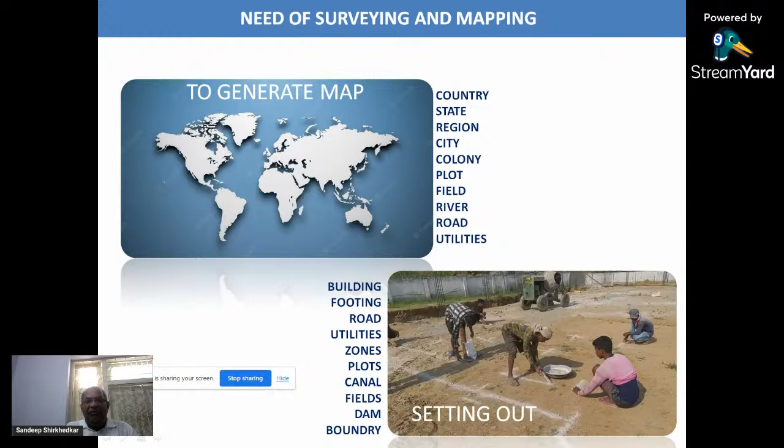As shown in this figure, setting out of the column positioning is being marked by using the survey techniques. Very simple technique is used here, only chain or tape is being used to map this.

So these are the few traditional techniques which we are aware of: dumpy level, automatic level, prismatic compass, plane table, vernier theodolite. We have ourselves conducted various assignments and practicals during our curriculum, and we are very much used to these techniques. This is what I presume, and this is what I understand.

But these techniques have got certain limitations as compared to today's advanced technologies. The time required for preparing a map is much more in these technologies than what we consume today. Then accuracy is another thing on which these recent technologies have worked very hard and came up with very accurate solutions for us.

Like in a prismatic compass, we have accuracy of half a degree, that is 30 minutes. Like in theodolite, 20 seconds.

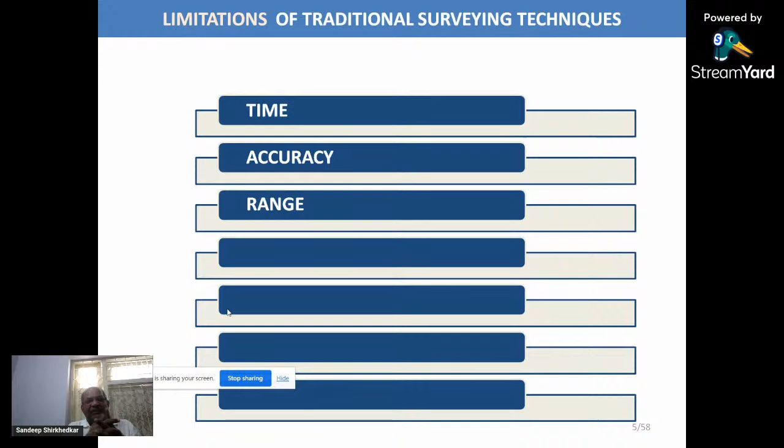While measuring at elevation, this leveling staff has got a least count of 5 millimeters. But these days, very super accurate instruments are available. You can even map a fraction of millimeters by using advanced technologies.

Another limitation of traditional technology is you don't know exactly where on the surface of the earth the object is. Now with new technologies, by taking help of GPS, that is global positioning system, we can identify our position on the surface of the earth, and it becomes very easy to connect various databases. For example, if somebody asks me to conduct a survey for Anjuman complex and someone else is doing it for the VNIT premises, and if I need to combine these two surveys, then we need to know the global positioning of the objects present at both locations. With traditional techniques, this may not be possible.

Human resources: in traditional surveying techniques, we need a lot of resources to conduct the survey, whereas the requirement of resources is very limited when we use these advanced technologies.

Then comes weather. You can work in all weather conditions. Like plane table surveying, you may be knowing that under moist conditions it's not possible to work, but with the new technologies, we can very much conduct mapping operations even during a rainy season or monsoon.

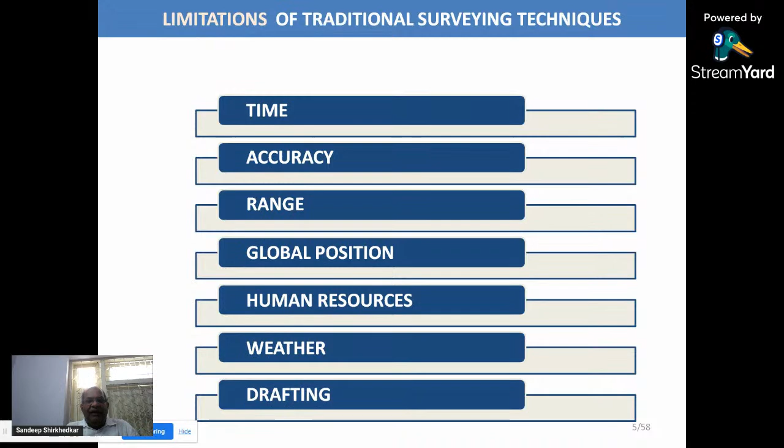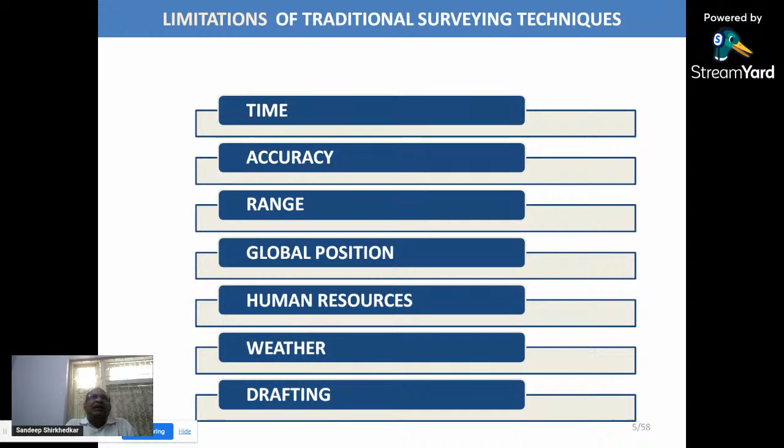Next is drafting. You have to collect data sets and then go to the office, and then on a drawing sheet or a graph sheet, or maybe on AutoCAD, you have to draft those things. This data is collected using traditional techniques, and the drafting is also a challenge. But nowadays, most of the data is collected in a digital format, and it is very easy to prepare a drawing, with most of the drawing work being done by the software itself.

So before moving to the technologies, we need to have our concepts clear about coordinate geometry. Coordinate geometry we have been learning since ages, since 6th, 7th standard. We are taking help of coordinate geometry for preparing maps or graphs.

So like a graph sheet, this Earth is also like a graph paper. It has got x and y coordinates. As you may be knowing, latitude and longitude - the horizontal line we call latitude, whereas the vertical line we call longitude. So every point on the surface of the Earth has got a unique latitude and longitude.

You must be agreeing with me - every point on the surface of the earth has got a unique latitude and longitude. And it makes my work very, very easy and simple, because every point, maybe in India, maybe in Africa, maybe in America, has got a unique latitude and longitude.

And the elevation, generally we refer it to the mean sea level. As you may know, for India, we observe elevation with respect to mean sea level at Karachi. So X, Y, and Z coordinates denote easting, northing and elevation in the language of survey - X direction is easting, Y direction is northing, and Z direction is elevation.

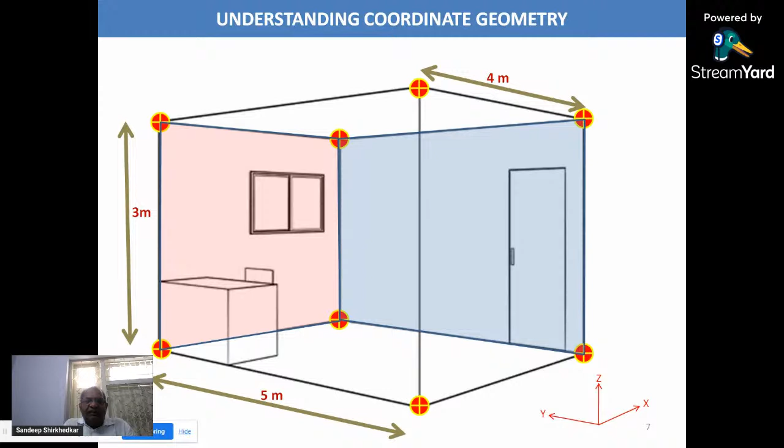Now if somebody asks me to generate a map of this room - 3D map here I'm talking about - I need the coordinates of only 8 points. If I opt to get the coordinates of these 8 points, it is very easy for me not only to generate a map or a plan, but I can also generate the elevation and the 3D view. These 8 points represent the entire room.

And if we discuss the coordinate system, for different points, if we assign the coordinate as 0, 0, 0 for x, y, and z coordinates, then the coordinates of all these 8 points are mentioned accordingly. So with reference to one point, considered as a reference point, we could identify the coordinates of this point. Imagine, by virtue of some technology, if we get the coordinates of these 8 points, my survey becomes very easy.

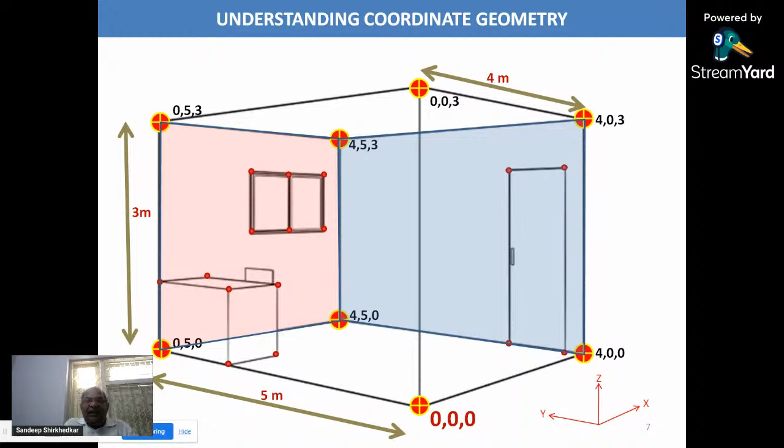I have also added more points in this figure which represent my window, door, and table. So this is a set of points for which I need information - I need x, y, z coordinates.

If we observe all these points together, I'm looking at all these points, see this - you will find n number of points over there. And this point we call a point cloud. All these points we call point cloud because these points have x, y, z coordinates. So this is a point cloud.

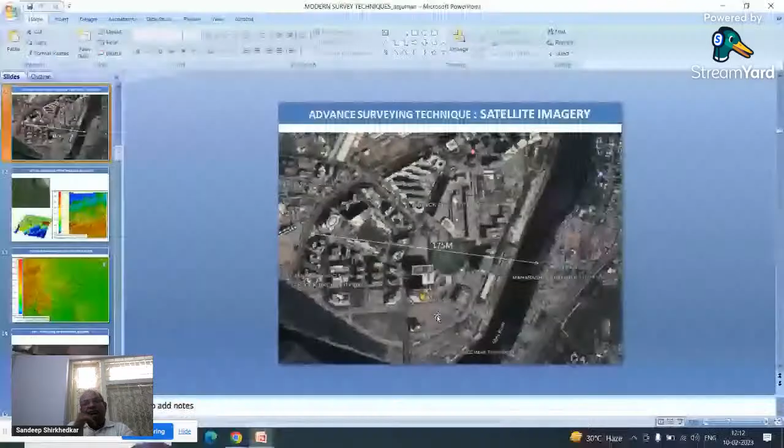Hello. Yes. Azad sir. Hello, Azad sir. Ashwini madam. Hello. Hello. Azad sir. Yes, sir.

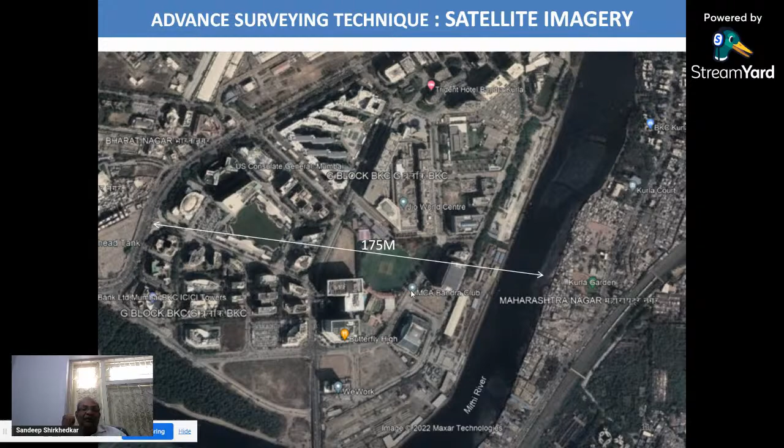Small objects, even 0.3 meter objects, nowadays we can identify through satellite images. Satellite images also help us know the elevation. But till now, the technology is not accurate enough to identify very precise elevation, though in general we can know what is the slope of the area.

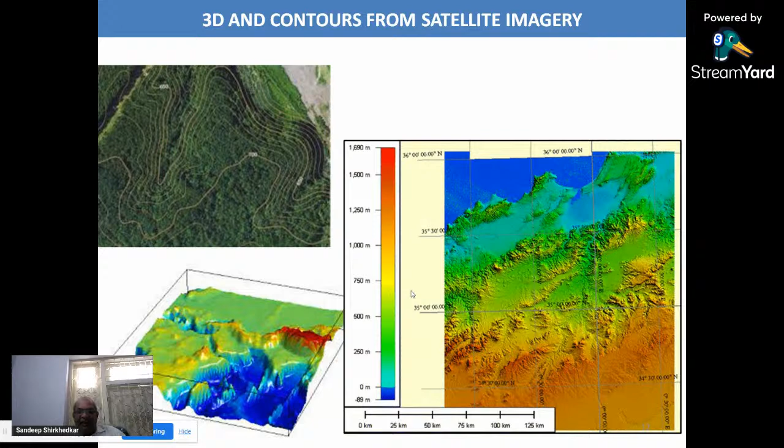Google Earth is an open source application. You can download it and start using it. You can also measure distances using it.

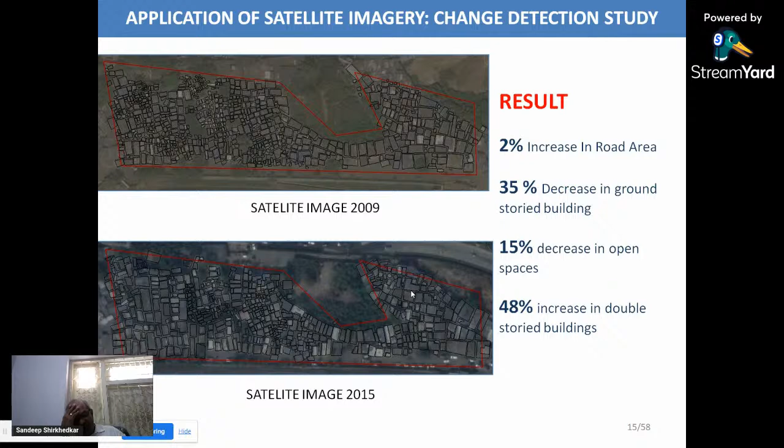One study we conducted using satellite imagery is a change detection study. I was required to identify what changed from 2009 to 2015 in a slum area adjacent to Bombay Airport, Mumbai. I found a 2% increase in road area, 35% decrease in ground storied buildings, many of which were converted to G plus one structures, a 48% increase in double storied buildings, and some open spaces decreased. This information is easy to get because historical satellite images of any area are available, allowing comparison of pre and post data.

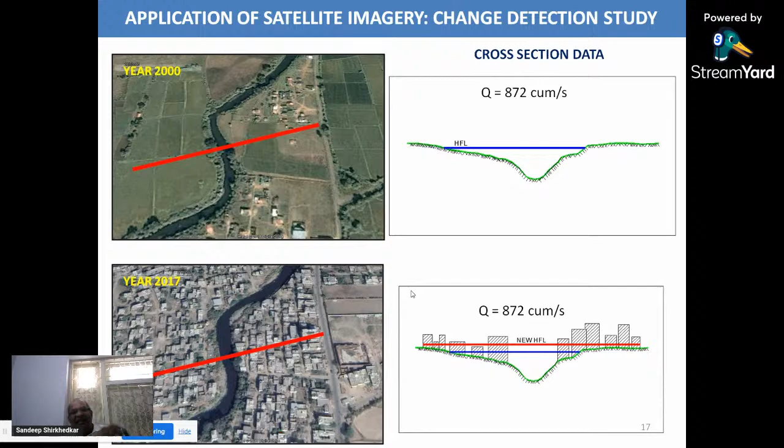So yes, this sort of study is possible by using satellite imagery.

I'm sharing all these things because it will not only give you insights about what is happening, but also insights about how you should proceed further for whatever research or project you are into. This may also give you ideas about your probable project assignments or career goals. I'm sure this information will help you a long way.

Another instrument we use extensively is GPS, Global Positioning System. It is a satellite-based system with satellites available round the clock, allowing us to find the XYZ coordinates we normally use.

We use this GPS generally for navigation purposes, for getting directions or reaching some location. For example, if I am right now on Wardha road and required to come to Anjuman College, I'll put the destination as Anjuman College, and this Google Map, mobile map or GPS map will guide me to your place. This is how we use GPS.

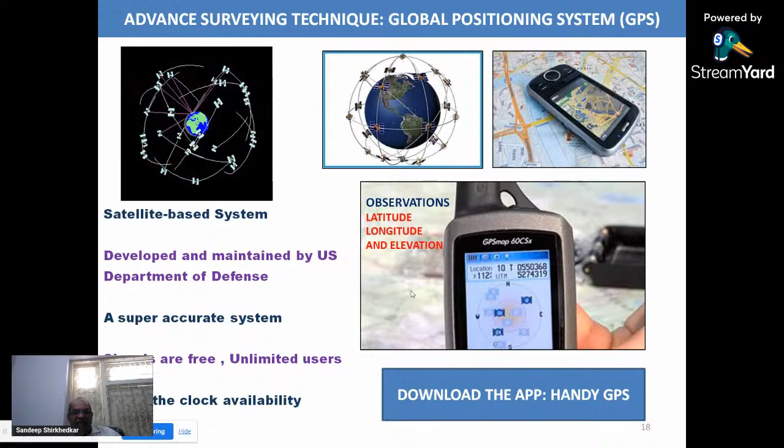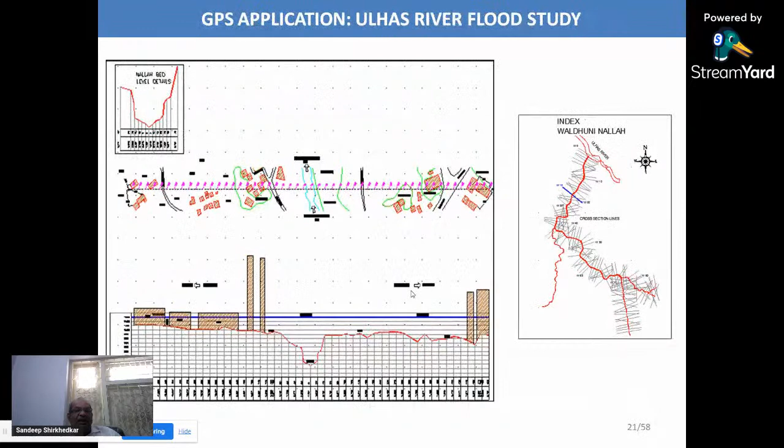GPS in differential mode is generally used for precise survey, wherein two points are observed simultaneously - one known point and another unknown point. On the known point, we fix a tripod and one base.

Observing the data, based on the rover combination we use, accuracy can even be up to 5 millimeters. In my opinion, it is a super accurate system.

Even in a total station, if you need to observe - imagine one point is on one side of my building, another is on another side of the building. For total station, I had to observe one point, move around, take the total station through a way to reach the rear side and then reach the point and observe the reading. But with this GPS being connected with the satellite, I'll go and observe a reading on the front side, go to the rear side and observe a reading, and that's all - I get the coordinates of the point under consideration.

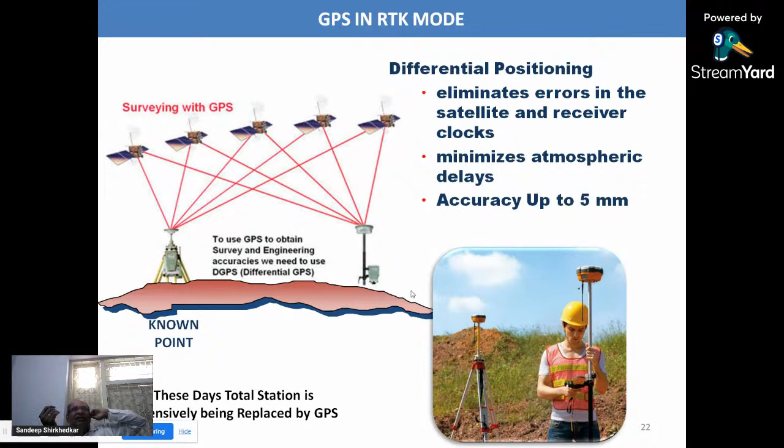So this is a very fast method. Round the clock satellites are available, even during rains you can conduct your surveying activity. So it's very extensively used, and nowadays at most projects it's a very good replacement for the total station because the work speed has increased with the invention of GPS in real-time kinematic mode, RTK mode as we call it.

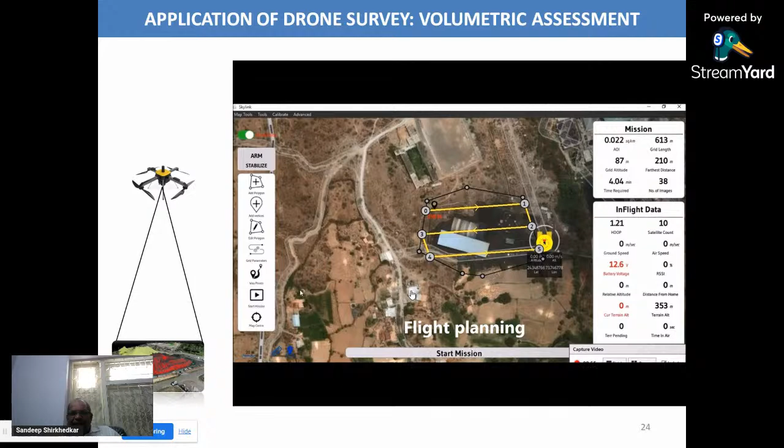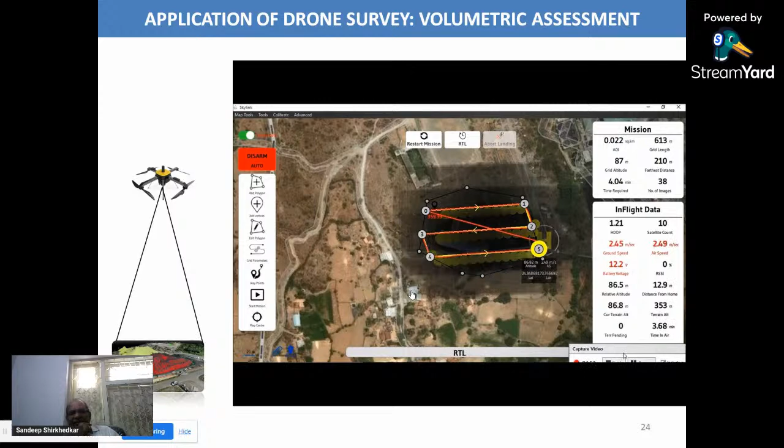My drone will move exactly along the programmed path, and now it will reach there. It's going, my drone is reaching the starting point. Yes, it has reached and now started collecting the data by moving along the specified path. So now data is collected and my drone will fly back. In a few minutes, a very big data set is collected.

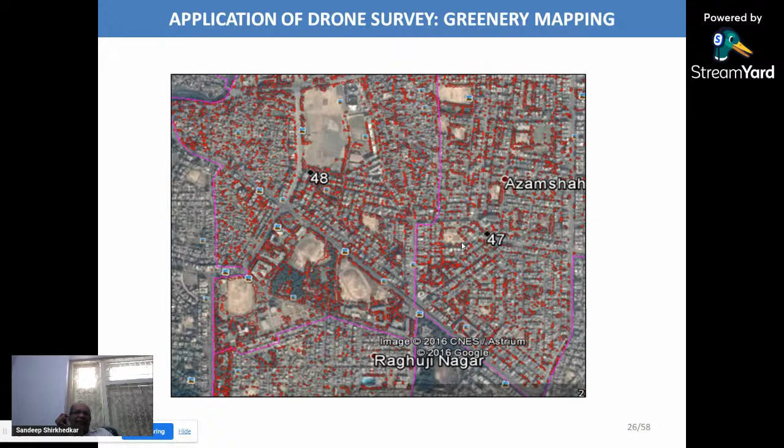So by using satellite imagery ये trees की canopies identify किया। और कुछ critical areas में we have used drone, like यहाँ दिख रहा है जैसा अजनी का area था हमारा, बहुत सारे पेड़ हैं वहाँ पे। इसलिए उस area को we have captured by using drone। ये हमारा अजनी का area जिसपे drone से data capture किया जा रहा है।

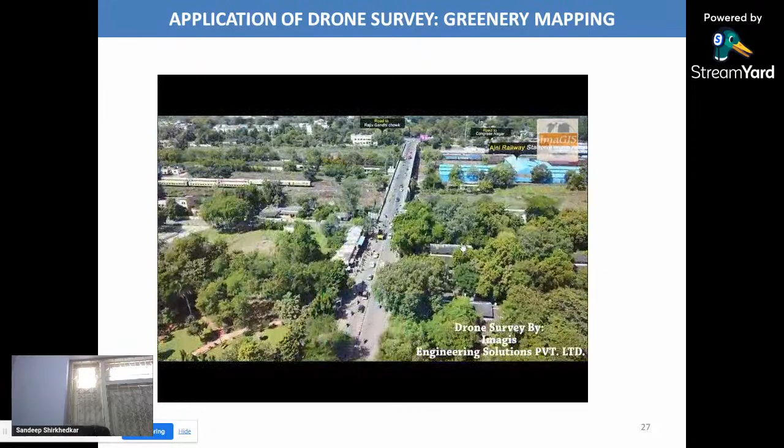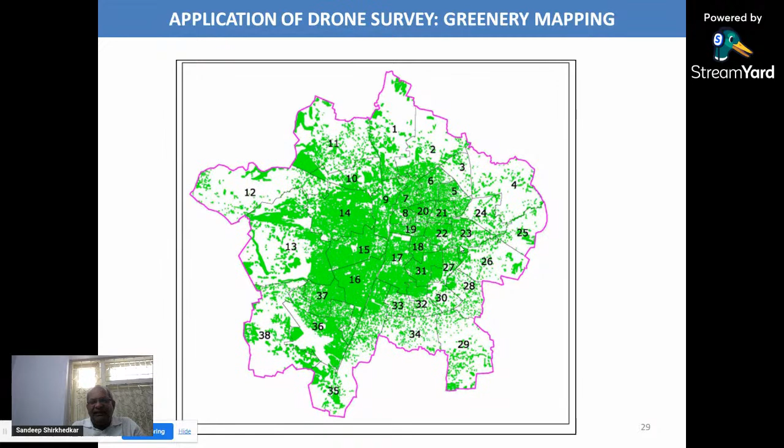Yes, यह दिस इज our अजनी ब्रिज, जो traffic जा रहा है, और railway के rakes भी हमें दिख रहे हैं, और ये यहाँ greenery है। तो सारा data compile करके, tracing करके, canopy जो है उसके identify करके, at the end of the day इस प्रकार का map हमें नागपुर का generate करने मिला। There are few प्रभाग जहाँ बहुत greenery है, और at the same time few प्रभाग जहाँ पूरा dryness है। So at the end of the exercise, this was the outcome।

There are certain प्रभाग like number 14 जहाँ 40% की greenery है, और certain प्रभाग like number 4 जहाँ सिर्फ 2% की greenery है। 40 कहाँ और 2 कहाँ, इतनी disparity हमारे इस नागपुर शहर में है। And for that matter, most of the cities reflect the same signature।

Mysore being a greenest city of this country, I tried to analyze even the Mysore area. I could get the similar results. So yes, for the equity development, this is not at all acceptable. So we need to plant more trees in the red zone areas than the green zone, because green zone is already all covered.

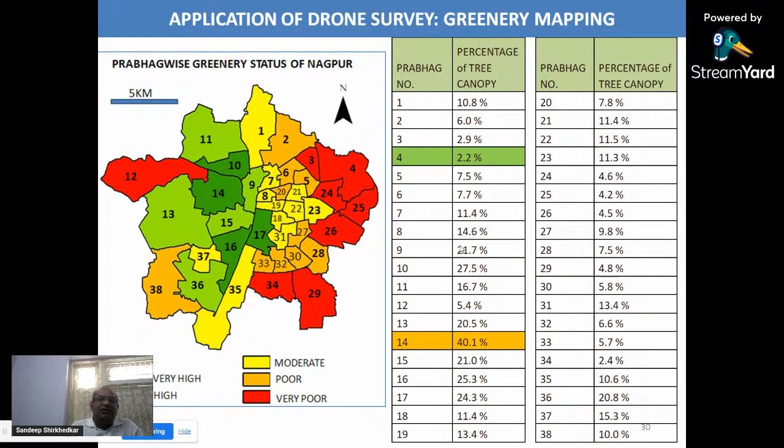Let us talk about echo sounder underwater survey. A very simple instrument is being used. This study is for sedimentation analysis for one of the reservoirs in Andhra Pradesh. My job is to find the quantum of sediment

accumulated. आप जानते हैं पानी के साथ साथ जो है sediment भी वही कराता है और quantifying sediment generally decide the remaining life of a dam। So ये echo sounder है।

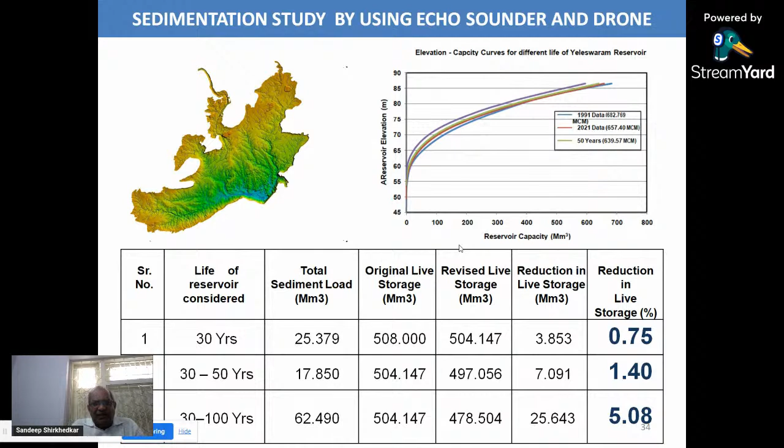ये है हमारा echo sounder जो कि हमें river bed की information देता है। Bathymetric survey आपने सुना होगा ना, ये bathymetric survey है पानी के नीचे का। फिर nowadays drone और echo sounder ये भी एक साथ use होते हैं। हमने ये अभी तक use नहीं किया है लेकिन it can be used।

Yes, and this is what we get at the end of the day. ये हमारा reservoir base के profile and we can compare it with the earlier data sets to get the sedimentation। You can find out big fish. You can study the aquatic life or whatever scenario is there, pollution below water, that thing can be analyzed।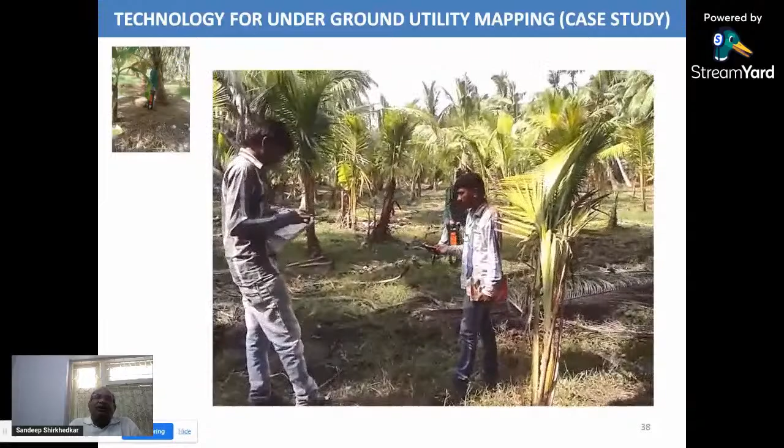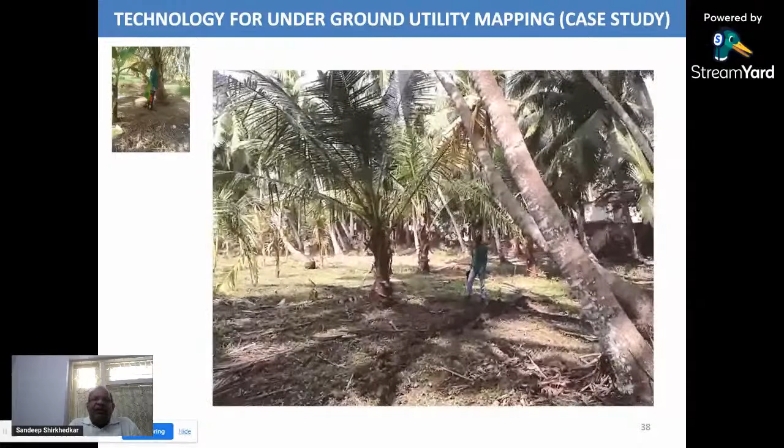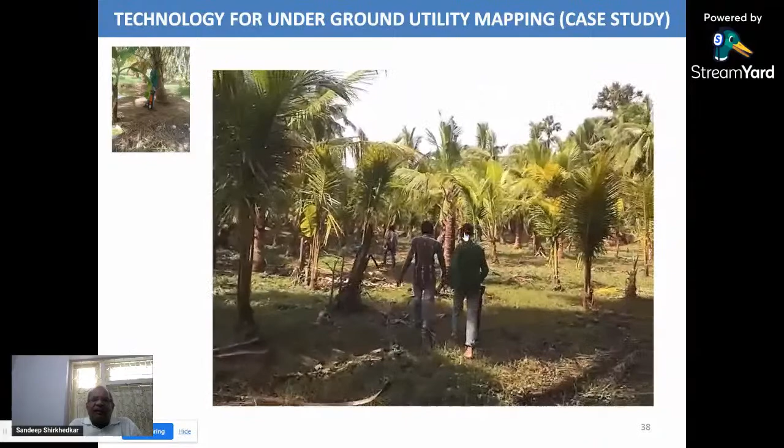Now we are trying to identify if there is any other utility, any other pipeline. This project is about the cross-country pipeline. ONGC had laid their gas pipeline long back, and our job was to identify the exact path because there are very few ground markers available. Another two surveyors are using GPS to observe the coordinates of this pipeline.

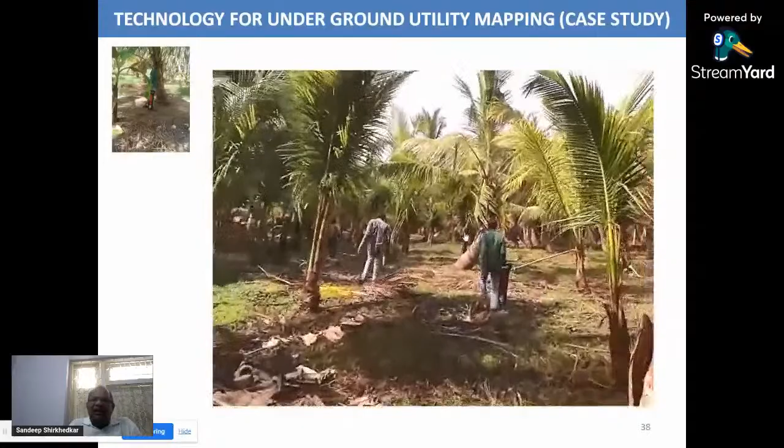So a humming sound means we are exactly moving along the pipeline. This is how this very precise, non-destructive instrument works. Without creating additional trenches, we can find out the location, depth, and characteristics of a metallic pipeline.

But the challenge was when there is a crisscrossing of pipelines. If one pipeline starts from the GCS and crosses another pipeline moving in a different direction, there is every possibility that this may mislead the mapping accuracy. In that case, we have one solution: attach a generator to that particular pipeline, and you'll get a higher signal only along that pipeline, making identification very easy.

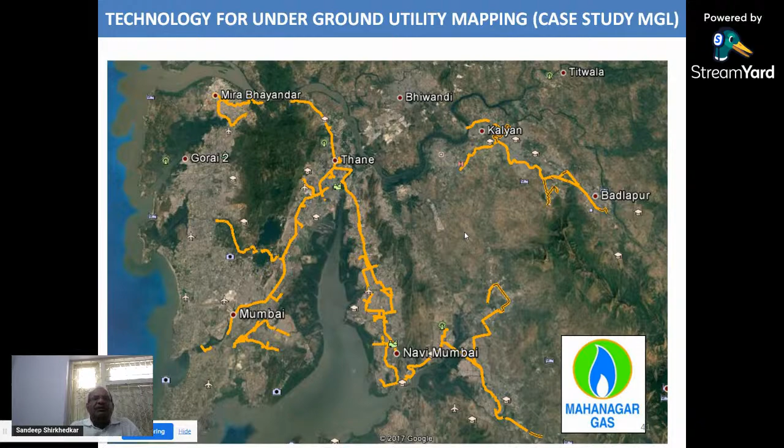Similarly, my next assignment was to find the location of a pipe for Mahanagar Gas Limited in Mumbai city, and this was my task. Among all these complicated pipelines, I was required to identify only the Mahanagar Gas Limited MGL pipeline. So yes, very simple, as I told earlier.

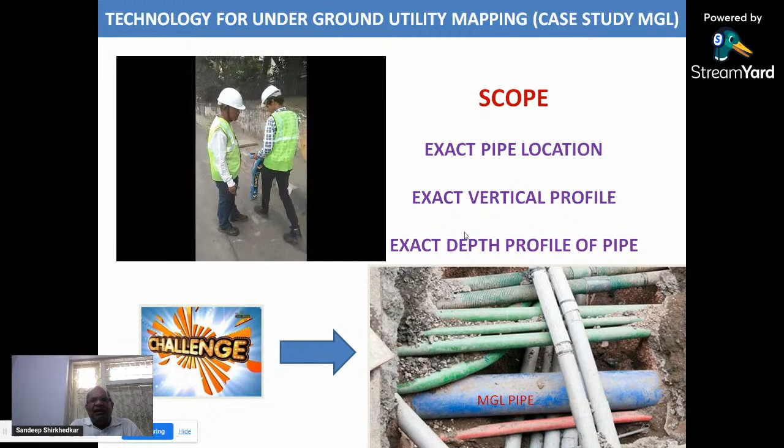The generator was attached to the system, and now my pipe locator instrument will start working, and it has started working. This point is identified wherein the depth of the pipeline was 1 meter from the surface.

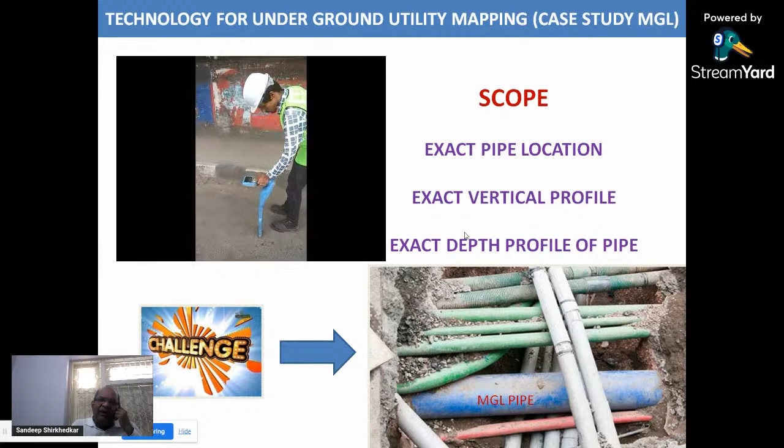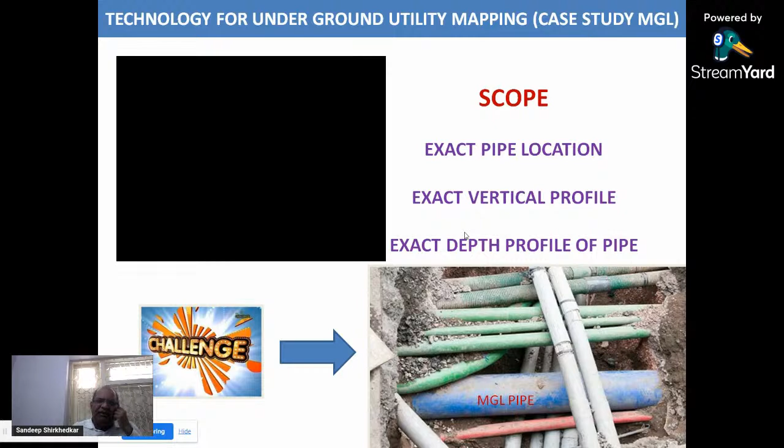Now he is trying to find the exact path which was followed for laying this pipeline. He is now exactly over that point, and here, 1.03 meters is the depth of the pipeline from this particular point. So yes, very easy, very simple.

But that's for identifying metallic objects. The next new technology is GPR, ground penetrating radar, as you might have heard. It is nothing but a scan. It gives you a scan, but data interpretation requires experts in the field of geophysics. You can work up to 6 meters deep using this GPR technology.

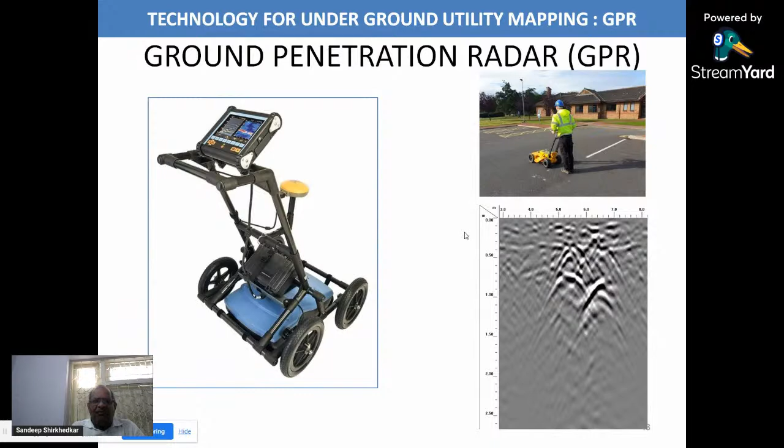It's like a scan. You have to move a vehicle along certain paths to collect data sets, and then you get a scan like this, which a geophysicist can easily interpret to get the pipe diameter and pipe location. Even non-metallic objects are identified here. In general, it gives you the dielectric constant or change of resistivity, and by that change, the strata can be identified or the material can be differentiated.

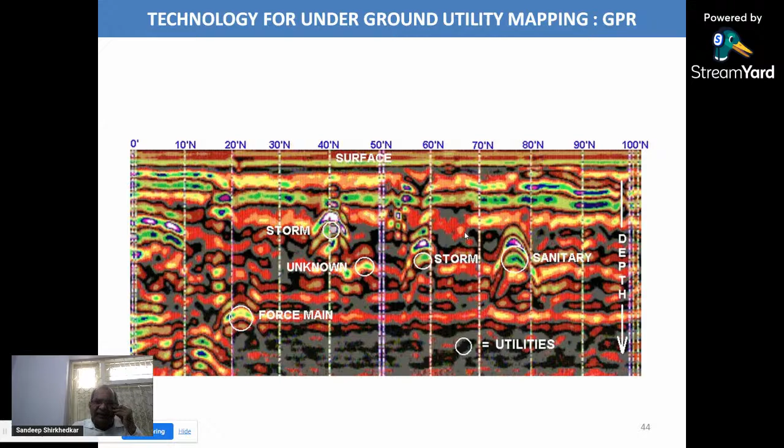Then comes a technology called LIDAR technology, very common and popular these days, a real buzzword. It is nothing but a scanner, you can say. I'll share a few of my projects conducted using this so you can understand its capabilities. You can handheld this LIDAR.

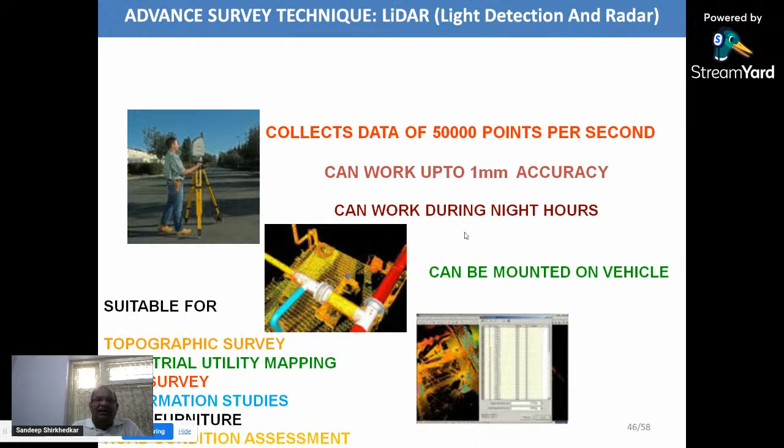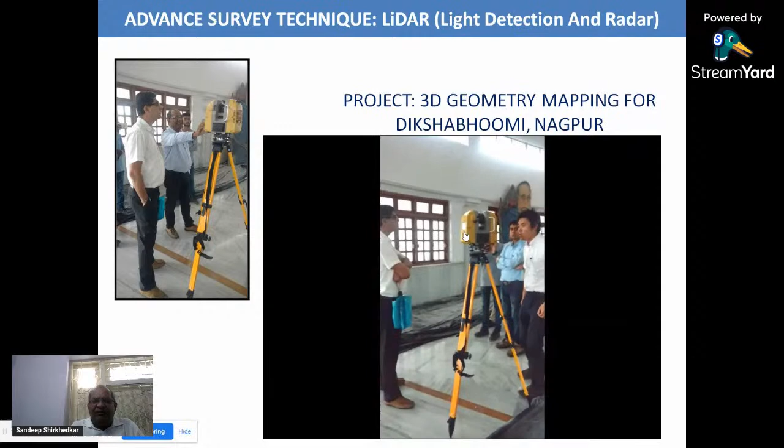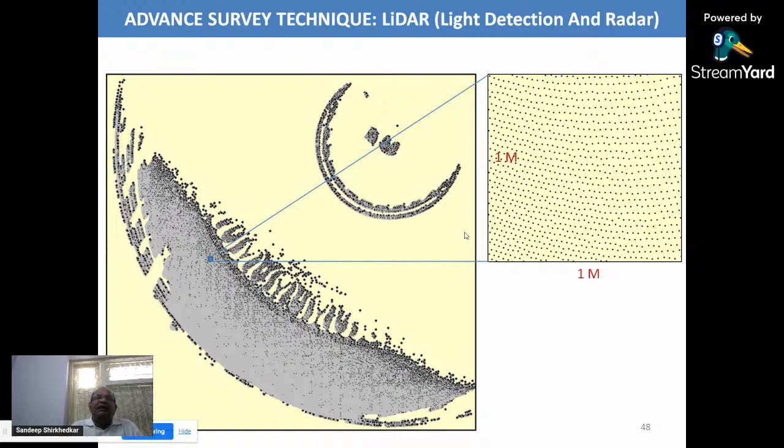Many of you may know Dikshabhoomi at Nagpur. My job was to identify the inside profile of Dikshabhoomi. So I used this tripod-mounted scanner, LIDAR. It scanned everything for me, and millions of point data were collected. Even in 1 meter by 1 meter, I could get thousands of points. It was very helpful for me to precisely map the inside geometry of this particular Dikshabhoomi.

As I told you, this LIDAR we can hold in our hand and move like this, calibrating, gathering certain ephemeris and information. Now this person will lift it up and move.

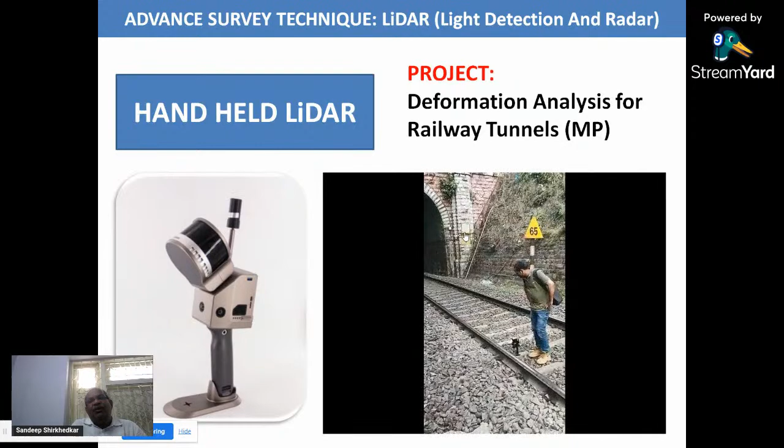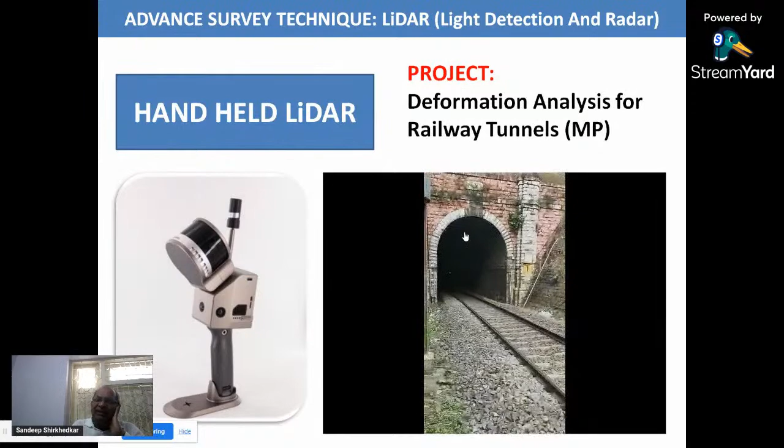Here, my job was to identify deformation in a tunnel. A railway tunnel. Many of you might have traveled along Itarsi on the railway line. This sort of tunnel is there, and yes, they started moving, and inside the tunnel, the data has been created, and this is that dataset.

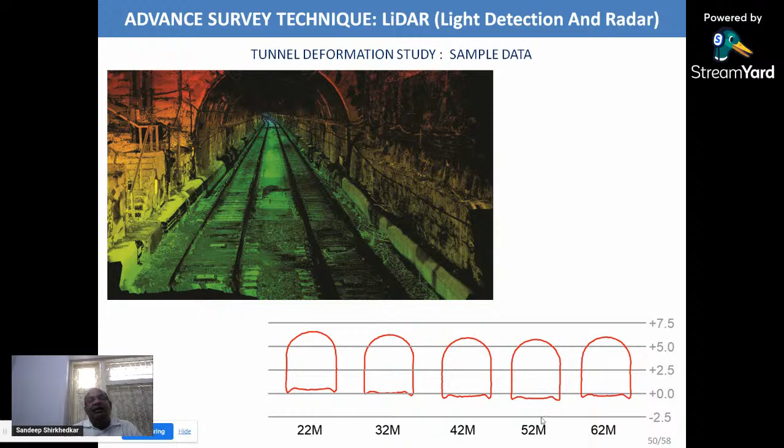Then another way of using this LIDAR is we can mount it on a vehicle. This is vehicle-mounted LIDAR, which is a very advanced and very fast-working technology. At the vehicle's speed, see the vehicle is moving at this speed, and at this speed all the surrounding data is being scanned. The data is being scanned with this speed.

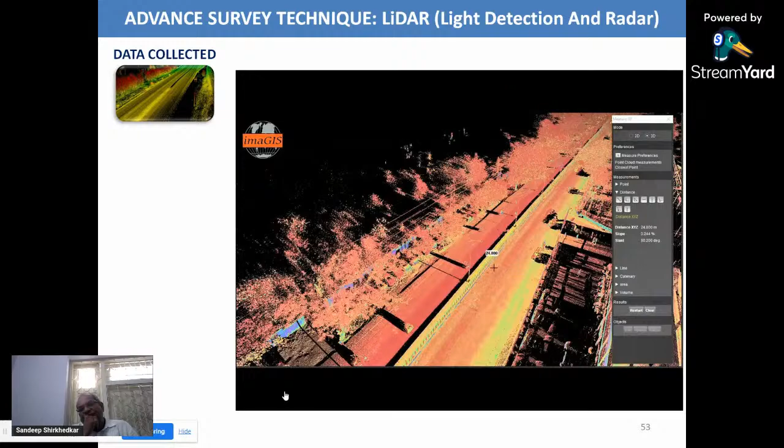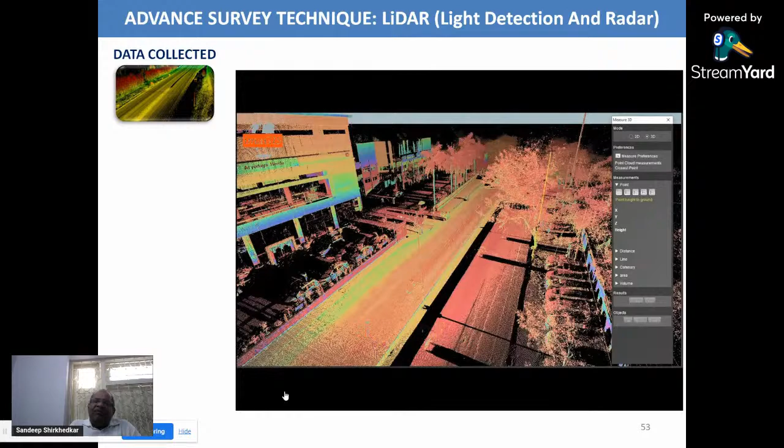So very fast, very accurate, super accurate system. Millions of point data is available. You can extract whatever information you are looking for based on your application. So yes, this is a very basic system for conducting a linear survey, especially along motorable roads.

This same instrument can even be used for identifying road surface characteristics, road condition assessment, what we call. Everyone needs a smooth road. What are the parameters which define the road as smooth? Those are raveling, potholes, edge break, cracks, bleeding, rutting, disintegration. These are the properties which obstruct, and which should be quantified and rectified.

This particular instrument, called mobile lidar or network survey vehicle, helps me get these parameters. I can even get the depth of the crack, the width of the road crack, or the dimensions of a pothole. This data is captured and stored, and reports are automatically generated as far as road conditions are concerned.

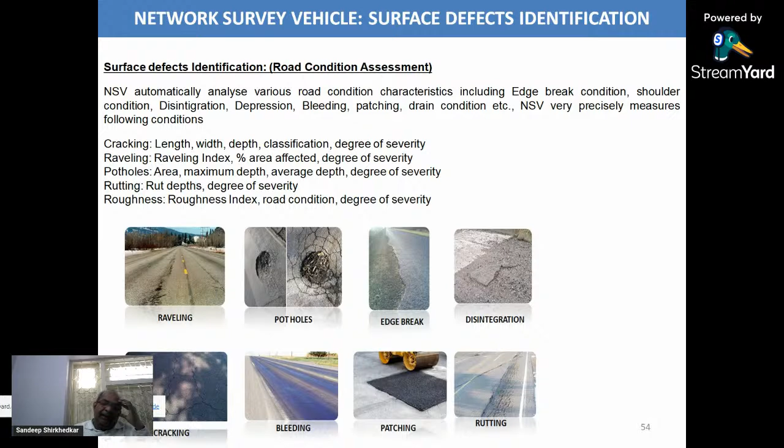Like one of the projects we recently did in Nagaland, these are the gist of information we could extract from the NSV. For this 34 kilometer stretch, the raveling affected area was 4.25%. There were 263 potholes. Edge breaks were 4.68 square meters. Cracking was 15.8% of the area.

This is the summary of the entire road, but for every 1 meter we can get this sort of information, and you can utilize it for the betterment of mankind and improving the riding quality of the road.

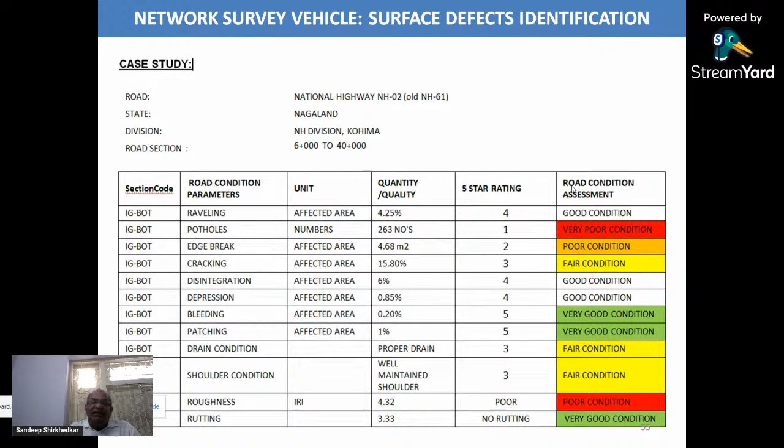Based on these parameters and observed readings, as per the standard, the road rating is given to a road: poor, bad, fair condition. What we found was too many potholes - very poor condition as far as potholes are concerned, and poor condition as far as road roughness is concerned. So this sort of analysis is possible, and we can maintain the road quality.

So this is how the lidar works, and this is how we get the information and interpret it. This has really changed the expectations of common people. It has changed the measurement pattern for us engineers, and we can analyze things very precisely and rectify them as per the precise defects identified.

Quick data is gathered and represented. Drafting becomes very easy, very few resources are required. You can imagine it would take 1 year to collect this data from Nagpur to Amravati manually, but in a couple of hours I could collect that data. That is the resource optimization I'm talking about.

Data interpretation is very easy, and we get point cloud data. This is where the technology stands as on date, and technologies are growing exponentially. Very soon we'll come with different technologies, maybe based on different principles of operation, and as engineers we should make ourselves aware of these technologies. This platform helps me make this technology popular by sharing my knowledge with you, for you to use in further studies or career.

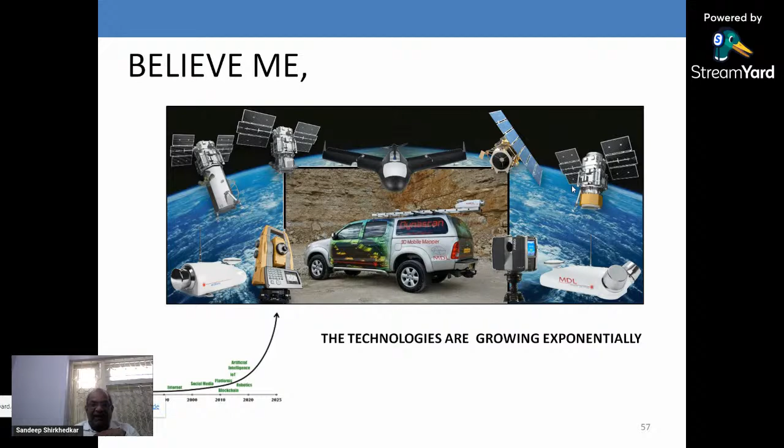Ladies and gentlemen, it is our responsibility to make these technologies more popular, because the benefits are many. At the end of the day, the common man will be benefited if we move towards technology. My project monitoring becomes easy, I can optimize various activities, and we can provide better surface, better quality, better construction for our society. This is our collective responsibility to make these things more popular.